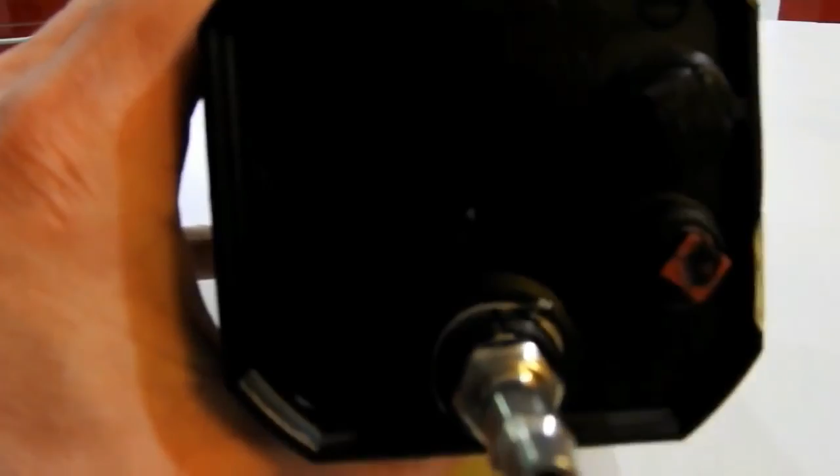You can see on the back here, let's put a light on it. At the top you've got the vacuum port, so you could power this using a vacuum pump. You've got the cage there - I'm guessing you take the bung out and insert something to keep it caged whilst you test it. And then you've got the air inlet, which is the one I'm going to be using, so I'm going to be putting pressurised air into this thing. It just so happened that this standard fitting off a compressor hose fitted the threads perfectly, so that was very convenient.

If I turn it around to this side, it tells us not to exceed 20 inch-pounds of torque, so I know what pressure to apply, or not to exceed anyway. You can see it's still got these warranty seals on just here. It's manufactured by BF Goodrich Aerospace.

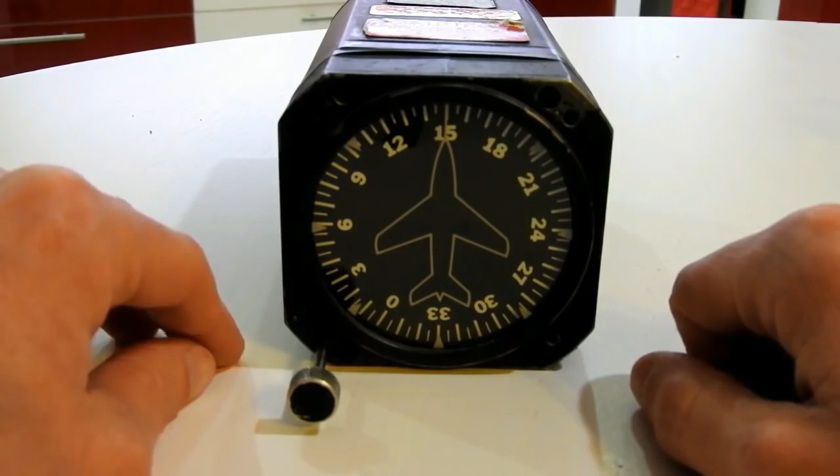You can see here it's got the cage knob, so this is what we would use to set in the heading, aligned to the magnetic compass. It just so happens that it has a nice scale on here, so we can try and capture some apparent drift, because these things, according to mainstream science, absolutely record apparent drift and must be corrected because of it. So I'm going to be testing this in this video later on, and we're going to see if it actually does indicate apparent drift, or whether it only indicates mechanical drift due to friction in the bearings.

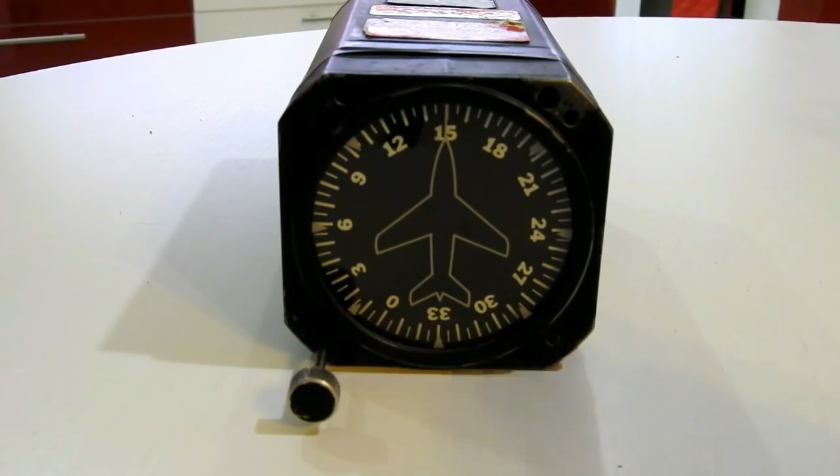Okay, let's go back and have a brief look at how it came to be that gyroscopes are supposed to be able to record or demonstrate the rotation of the Earth.

According to Wikipedia, this man here, Leon Foucault, in the mid-1800s invented the Foucault pendulum, which was suspended from the ceilings of very tall buildings throughout Europe to demonstrate the spin of the Earth underneath them over a prolonged period of time. In 1852, a couple of years later, Leon Foucault came out with, quote, conceptually simpler experimental proof of the spin of the Earth using a gyroscope.

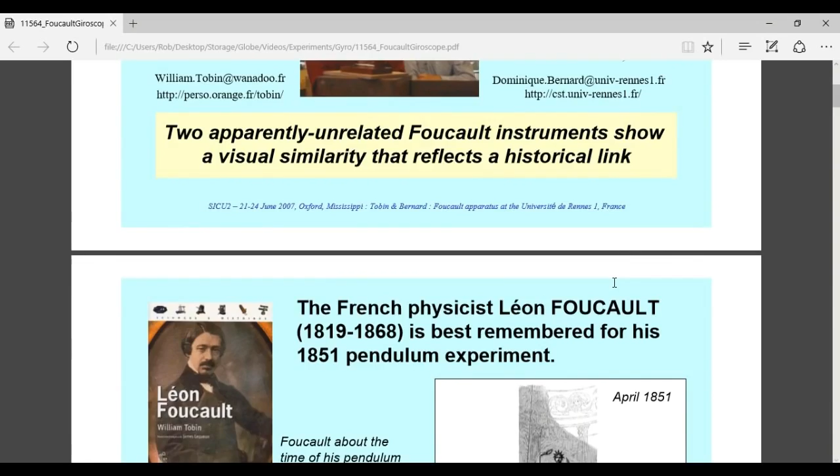So I found a paper online, which I'll provide a link to in the description, written by somebody at the Université de Rennes in France. It says, Foucault gyroscope and induction current apparatus in the University of Rennes physics collection. It's written by these two guys here, which I'm presuming is these two. This paper talks about two instruments - I'm not so bothered about the induction current apparatus.

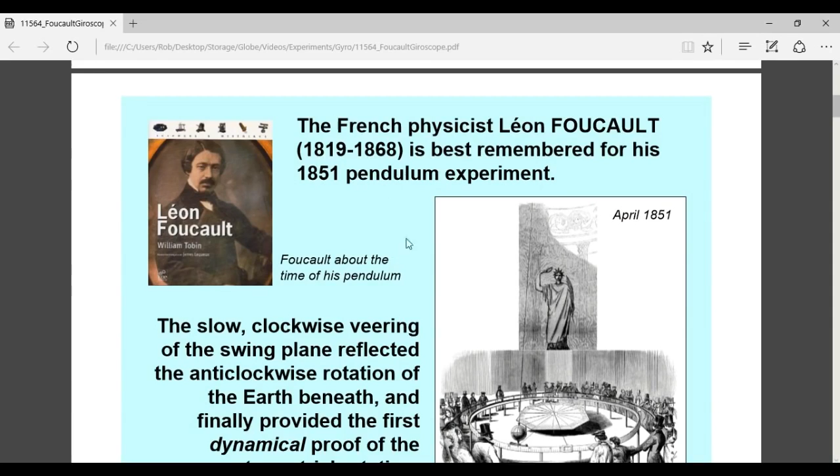So let's read on. The French physicist Leon Foucault is best remembered for his 1851 pendulum experiment. The slow clockwise veering of the swing plane reflected the anti-clockwise rotation of the Earth beneath, and finally provided the first dynamical proof of the terrestrial rotation. And here's sort of a diagram of it.

So the following year, in 1852, Foucault devised a new experiment for demonstrating the Earth's rotation. He called it the gyroscope, from the Greek words meaning to look at the rotation. Low friction gimbals allow the spin axis of the torus to stay fixed in space. The microscope or pointer are used to monitor the slow drift of the axis relative to an earthbound experimenter.

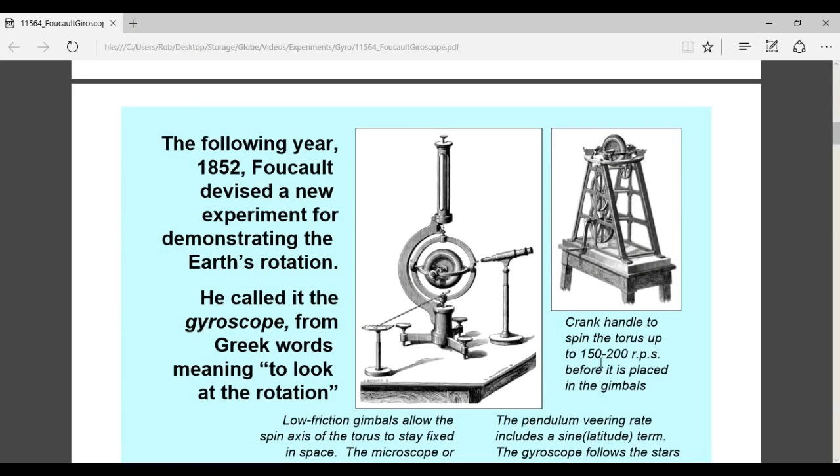This apparatus uses the crank handle to spin the torus up to 150 to 200 revs per second before it is placed in the gimbals, which is here. So the pendulum veering rate includes a sine latitude term, which I'll be using later.

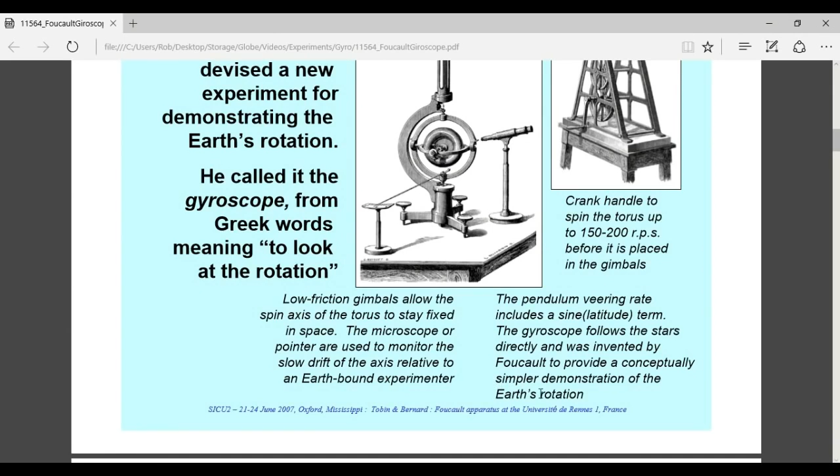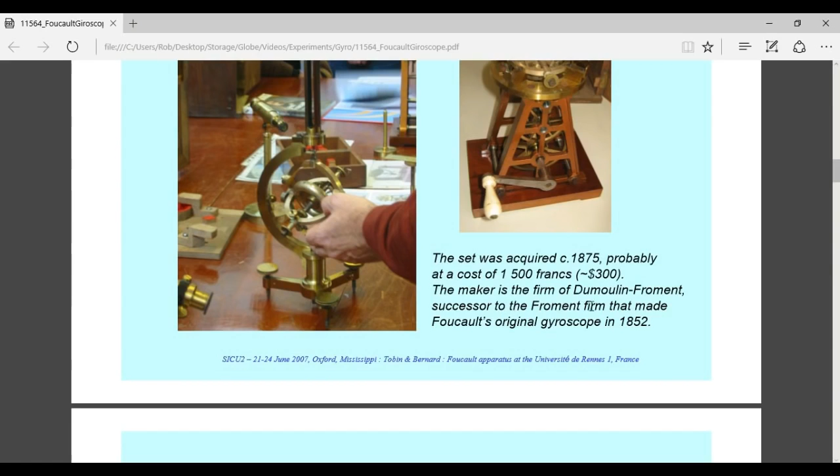The gyroscope follows the stars directly and was invented by Foucault to provide conceptually simpler demonstration of the Earth's rotation. The University of Rennes holds a Foucault gyroscope set in its physics collection. The set was acquired in 1875, probably at a cost of 1,500 francs, which is $300. The maker is the firm of Dumoulin Froment, successor to the Froment firm that made Foucault's original gyroscope in 1852.

So note, this is not the original gyroscope. And whilst we're on this slide, let's just look at the size of the guy's hand in comparison to the gyroscope flywheel there. I first thought that the gyroscope was much bigger, but when you actually see it with a reference, as in this guy's hand, you can see how small it actually is.

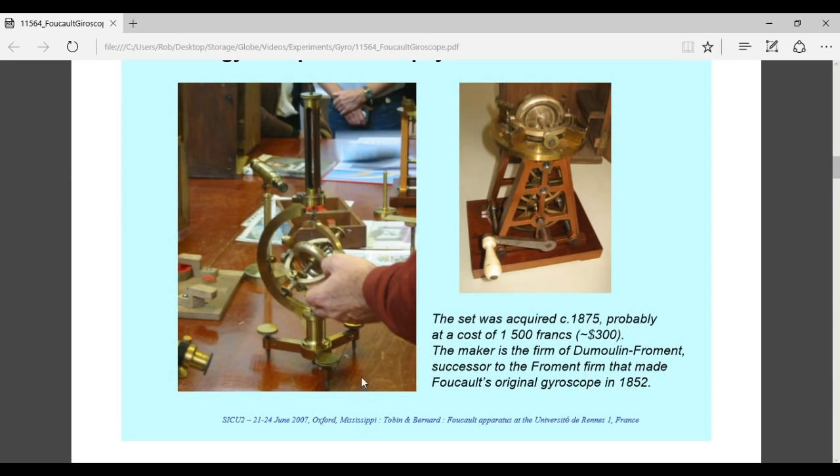And here is the apparatus that's used to spin it up. Foucault gyroscopes are exceedingly rare, perhaps because they were very expensive, 1,500 to 2,500 francs - so not for the common man. The original 1852 gyroscope was bequeathed to the Collège de France and has been lost.

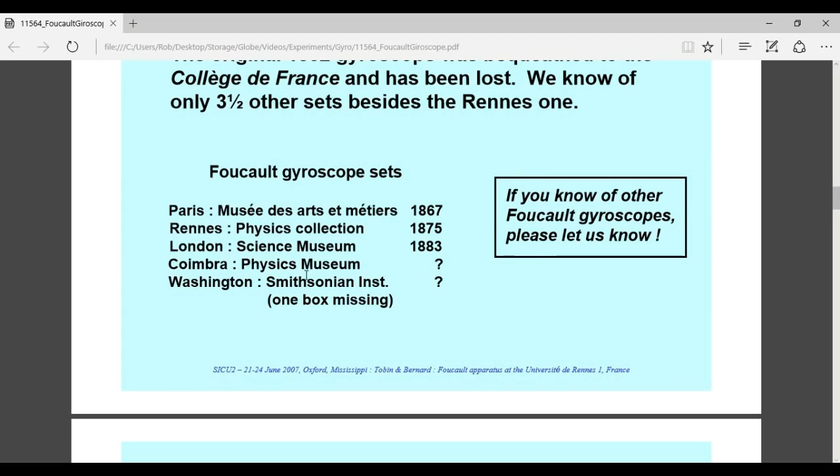Really careless. We know of only three and a half other sets besides the Rennes one. There's one in Paris at the Musée des Arts et Métiers, one in Rennes that this is talking about, one in London's Science Museum, one in Coimbra, and one at the Smithsonian Institute in Washington. If you know of other Foucault gyroscopes, please let us know.

So a gyroscope set came with two rotors. One is missing from the Rennes set, and the other has broken suspension pins, so we have not yet been able to set the gyroscope going.

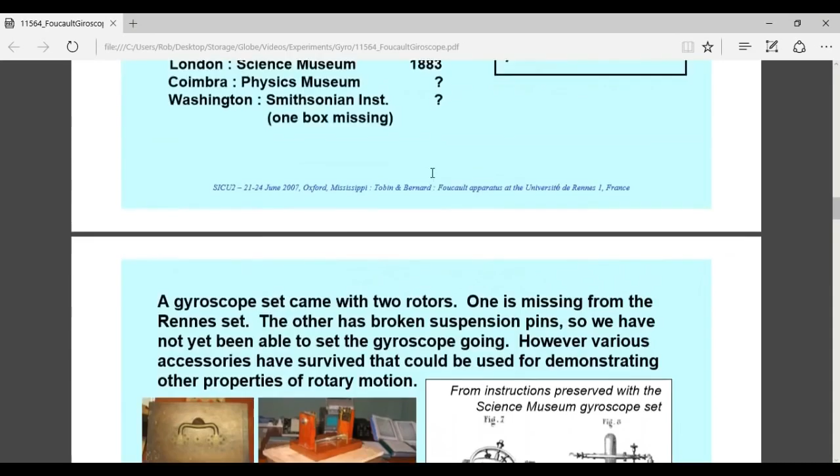What? Not yet? According to this, you've had it in your possession since 1875.

So 144 years later, and they've still not been able to set the gyroscope going. I guess we can't fabricate some pins in this day and age—we just don't have the technology anymore.

However, various accessories have survived that could be used for demonstrating other properties of rotary motion.

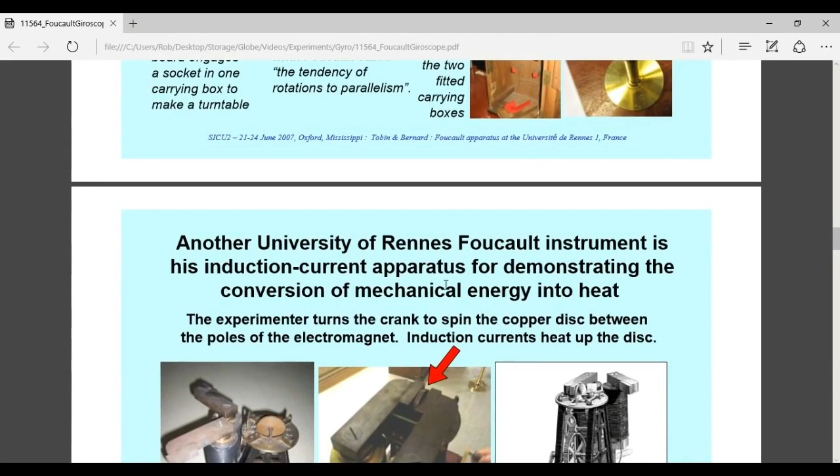There's a few more pictures here, and then it goes on to the induction apparatus, which I'm not really interested in. So let's go on to have a look at some pictures of this original apparatus.

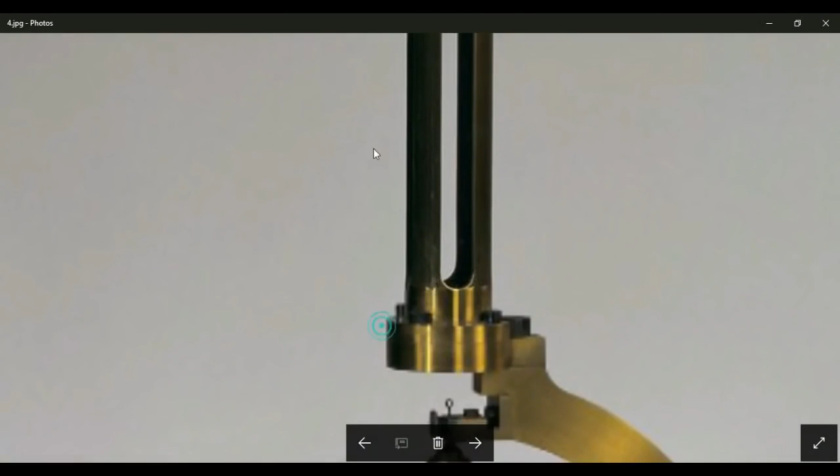Here's a close-up—I'm going to zoom in and show the top. There's a little hook here onto which a low torsion cord would be suspended. This is threaded, so you could screw it up and down by hand. The cord would attach onto this little loop, and the whole gimbal is able to spin freely upon this domed piece of steel via a tapered conical piece of steel, forming a low friction bearing point just here.

The sides of the gyroscope have bearings called knife edge bearings—I'll show a close-up in a second. The bearings in here, the main spin axis bearings, weren't even ball bearings, because ball bearings hadn't been invented yet. They'd been patented by 1852 but not manufactured—I think it was 1869 before the first ball bearings were actually used. So much more inferior bearings here than what we use today.

Okay, so I have replicated this setup, and the next few experiments are going to demonstrate what I have come to learn from them.

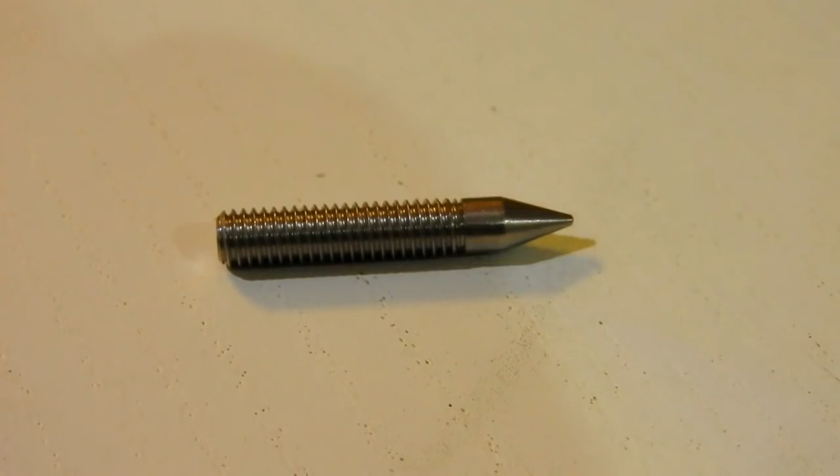For the low friction bottom pivot point, I'm going to use one of these—a speaker spike. You have four of these attached to the bottom of a speaker, and the idea is that because only a tiny bit of the surface makes contact, it prevents resonance and loss of sound. That's the idea anyway. I've bought this and will use it as the bottom part, so this will sit through here once I've threaded it properly. I might have to cut a bit off the top, shorten it down, but essentially that's going to be the part that contacts with this part here to cause a low friction pivot point.

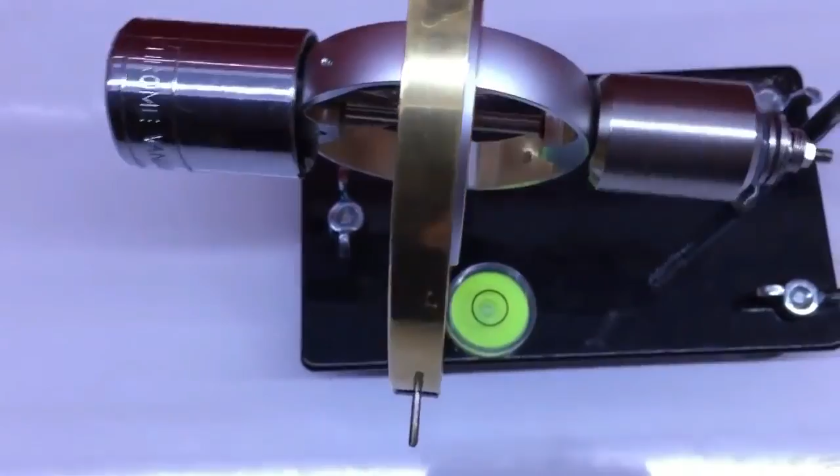And I'm able to use this hex key adjustment here and raise or lower this gimbal, and I can lower it so that the speaker spike drops down nice and gently and controlled onto the bolt.

So as you can see, if I go to the end here, the little piece of metal you can see there is part of a pencil sharpener blade. I've just cut it in half, put one on each side. So these, I guess, knife edge bearings here, they're not quite a knife shape, but the diameter I would guess is not far off the bottom of the knife on Foucault's knife edges.

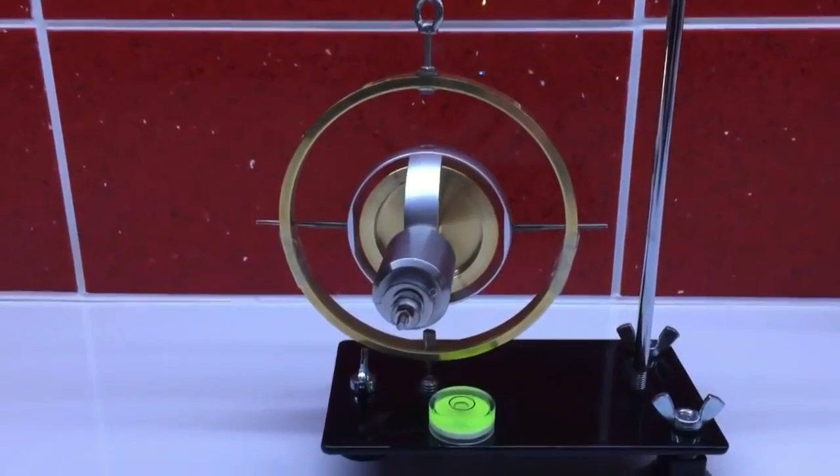So I'm going to spin it up and show you what I mean. It's quite bizarre, and I didn't know that this phenomenon actually occurred with gyroscopes. So I'm going to stop the video now and get it spinning.

Okay, so I'm going to be spinning the gyro with my Dremel tool, and you can see there it's 33,000 RPM. That's no load, but it will virtually be no load once it's up to speed. Let's spin it up then.

So let's observe what happens.

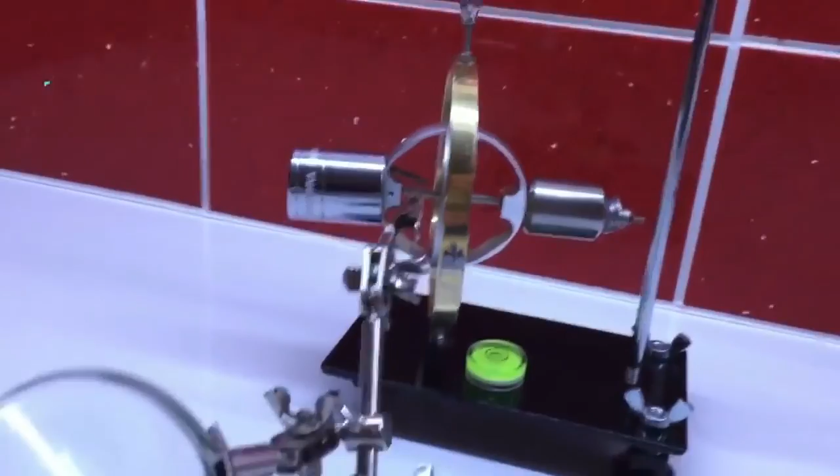Let's see if it's going fast enough to do it again. Now watch carefully, watch this axis very carefully to see if it moves when this touches.

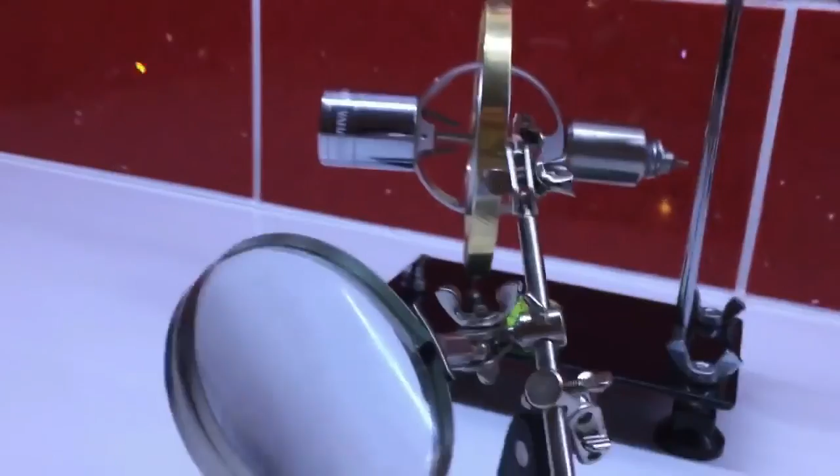Did you see that? It precessed itself back up straight again, and it's sending it back round clockwise now.

It will continue to do this, and it will actually in fact carry on going one way and then stopping and coming back the other way without me impeding it. But you can clearly see it's moved quite a long way from the crocodile clip there now.

And to further prove that it is still working as a gyroscope should work, I'm going to move it manually. Put it back straight again and see what it will do this time.

Okay, so this time I've let it come to a complete rest, and I've added a protractor and a paper clip as a marker, and we're on 129-ish at the minute. So I'm just going to give it a quick nudge and see if we can get it to come back to its original position.

There we go. It's 128 now, it's close enough. Just spin it up.

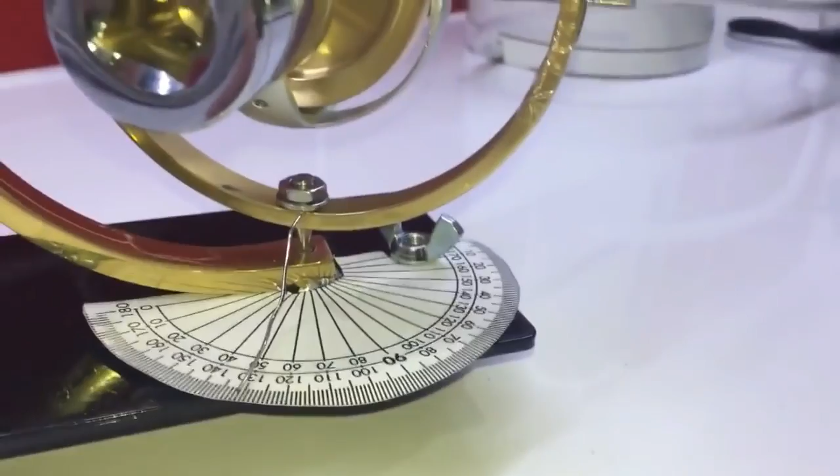Okay, you'll note I haven't got it quite straight. It's slightly over to the right at the top. But let's just observe what happens here to this angle.

Anyone guess what's going to happen?

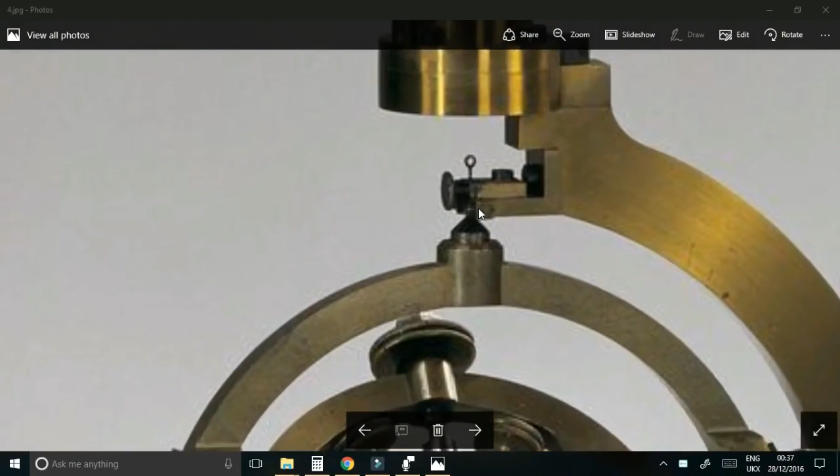We also saw earlier how a particular rotation or direction of rotation can be induced into the gyroscope. So it doesn't take too much of a stretch of the imagination to wonder if the rate at which it rotates could be controlled. I'm just putting this out there for consideration. I'm not saying this is what it was for, but let's just take a look at the top of Foucault's gyroscope here and look at what the function of this could be. It looks like to me it puts a pressure on the pin there, and it looks like it's threaded. So you could fine-tune that if so desired to slow the rotation down to a certain speed given a bit of trial and error. I mean, I can't think of a logical reason why you would need this. I certainly didn't need anything like this in my experiment.

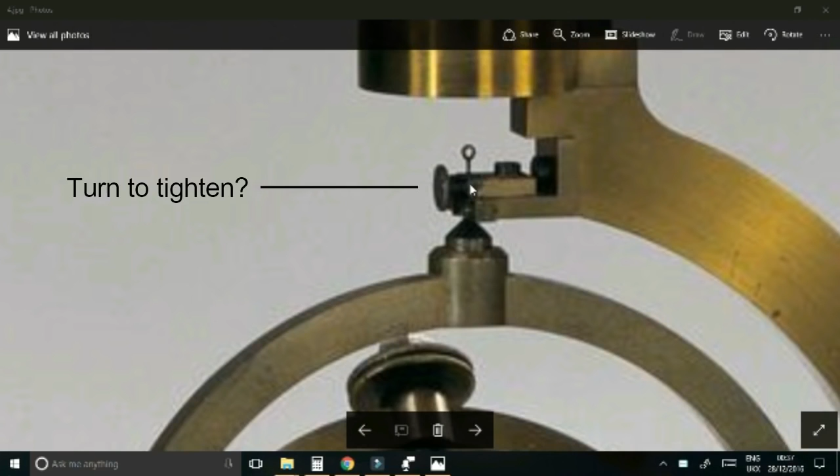The only other thing to consider, I suppose, is that this isn't actually the original gyroscope from the original Leon Foucault experiments. That one was lost, so I guess we'll never know what the actual one looked like. We can only presume that it looked similar to these ones.

Anyway, that's the end of part one. I'm now going to move on to the aircraft instrumentation section to this.

So I've watched this Navy training video countless times now to really try and get it into my head, everything that he's saying. So I'm going to play certain parts of it now, and I'm going to be commenting on certain parts of it, and analysing certain parts of it, just to put you in the picture as to where I am at with the whole gyroscope thing.

Modern high-performance aircraft require electric gyroscopic instruments: the turn and slip indicator, the attitude indicator, and the directional gyro. This film will explain the theory of operation of some of the newer electric gyroscopic instruments. To understand any gyroscopic instrument, you must understand the principle of the gyroscope. It consists of a rotor mounted in a gimbal. The rotor can spin in one plane only. When another gimbal is added, a second plane of movement is possible. And when this assembly is mounted in bearings, the rotor has 3 planes of movement and can assume any possible attitude.

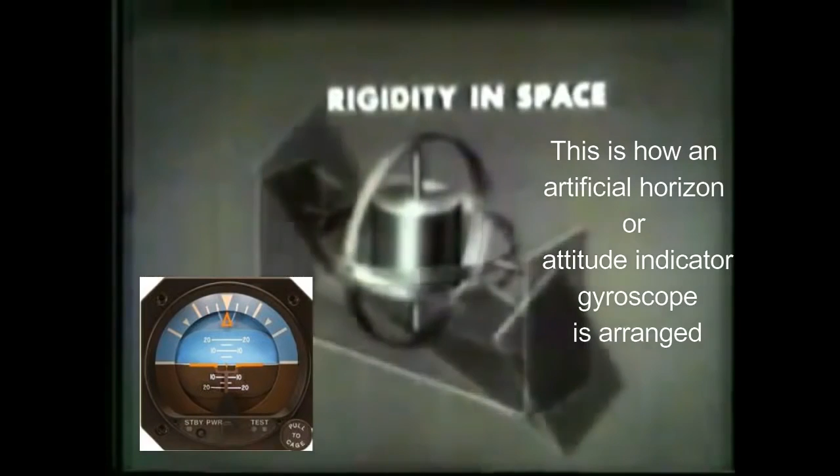As for rigidity in space, the spinning rotor remains in its original attitude, while the gimbals and base move around it. In other words, the gyro maintains its axis in relation to space and not to the surface of the Earth.

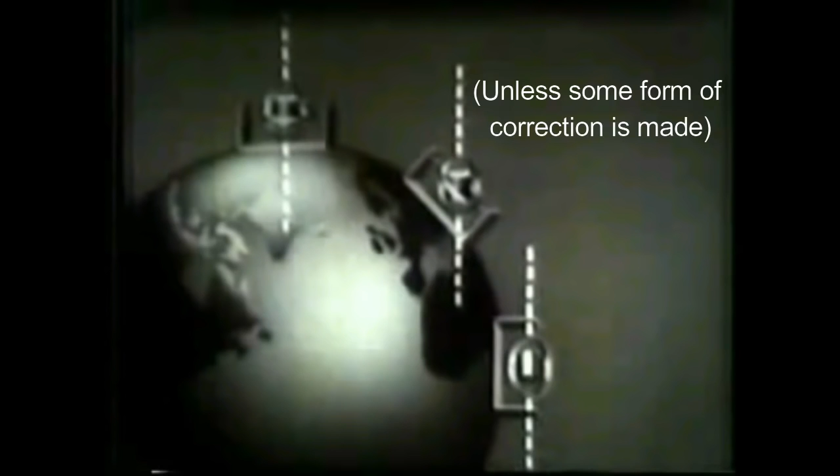If a gyro moves around the Earth, its axis is vertical to the Earth's surface here, at an angle here, and horizontal here. So very clearly here, he is saying that a moving object, like an aircraft, that is moving along the curvature of the Earth, because they are actually tilting as they move in relation to space, the gyroscope will remain rigid and won't move. So it will appear to an observer in the aircraft that the gyro has actually moved. That is clearly what is being stated here.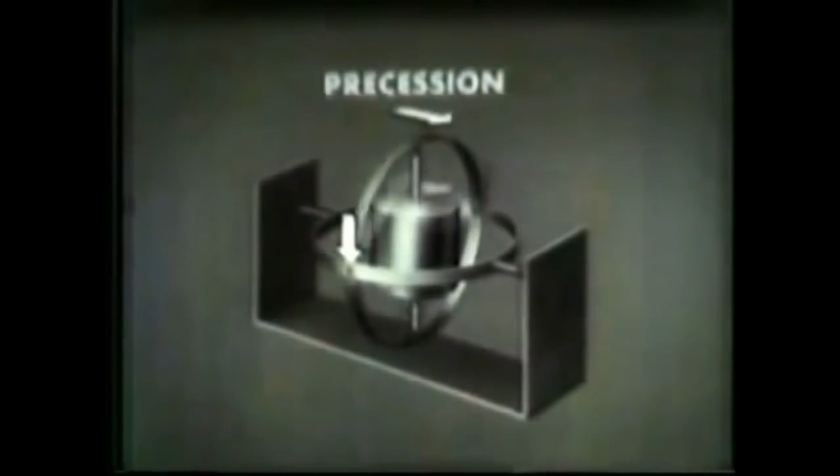The gyro will resist any force that attempts to change its plane of rotation. This leads to the principle of precession. When a downward force is applied here, the gyro moves, but not in the direction of the applied force. Instead, it moves at right angles to the applied force. This action is known as precession.

If an upward force is applied at the same place, the gyro again precesses at right angles, but in the opposite direction. The explanation is simple. The rotor is spinning in this direction. When the force is applied, the gyro precesses in a direction to align the direction of rotation with the direction of the applied force.

The rate of precession is in direct proportion to the applied force. Small force, slow precession. Greater force, faster precession. If enough force is applied, the gyro precesses a full 90 degrees. However, at or near 90 degrees, it will tumble and go out of control. This disadvantage must be overcome in gyro instruments.

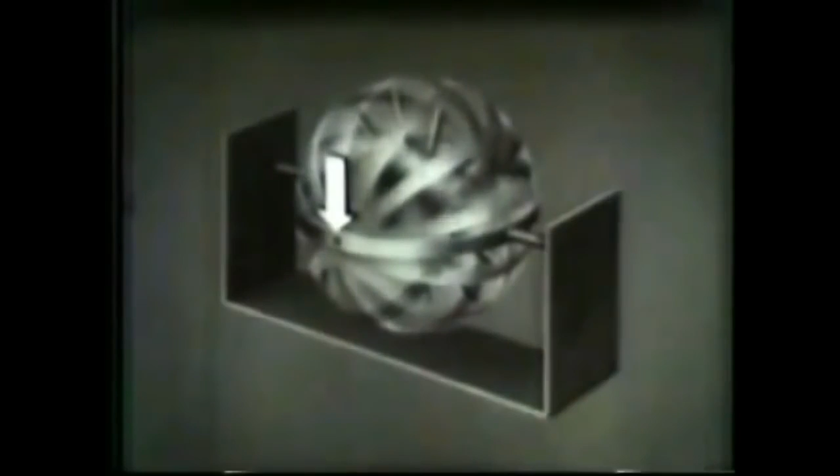Another disadvantage comes from the gyro's tendency to drift away from its original attitude. There are two types of drift. One is mechanical, due to friction in the bearings. The other type, known as apparent drift, relates to rigidity in space.

Once again, consider this condition. The gyro maintains its attitude while the Earth turns under it. Every 6 hours, the gyro drifts through 90 degrees in relation to the Earth's surface. Okay, I've got to stop it there because this is where a lot of confusion arises.

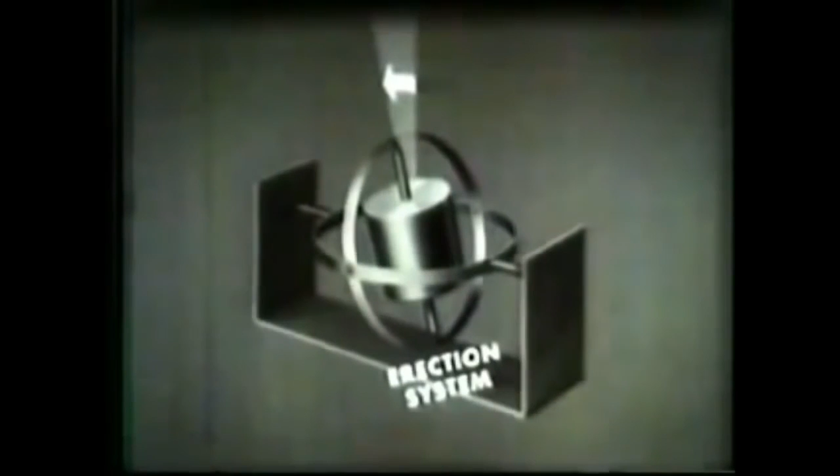In order for the gyro instrument to be dependable, drift must be corrected continuously. There are several types of erection systems that correct for drift. The principle back of all these systems is based on 3 steps. The direction and degree of drift are measured by electrical or mechanical sensing elements. These elements then control the application of a proper force to the gyro, and it precesses back to its normal attitude.

He does go into quite a lot of detail on how these actually work, using servo motors and the sensing elements to send an applied voltage to the motors to precess it back into its original position. So feel free to watch that video in its entirety, but I'm going to move on from there.

All gyros in this film are actually the rotors of electric motors. However, for simplicity, we will represent them like this, and this.

Okay, so I've drawn the missing axes on each of these gyroscopic instruments. We'll start with the one on the left, the turn and slip indicator. This is probably the simplest of the 3. It uses a spring to return itself back to centre each time once the turn is finished. So I'm going to disregard that particular one.

The artificial horizon, or the attitude indicator in the centre there, is the one we've just been looking at, and this is the only one of the three that remains rigid, as in it stays in its original position throughout an entire flight. So the whole gimbal housing, or the instrument housing, rotates around it as the rotor stays upright.

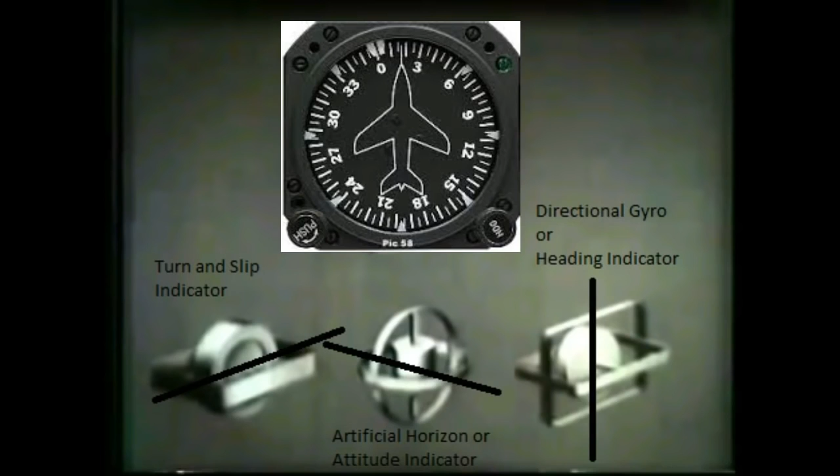So before we move on to the directional gyro, I'm just going to play a short clip from another video that explains how air-powered artificial horizons or attitude indicators work, because I believe there's a good test we can do to determine whether the pendulous vanes on these instruments, which is the method by which they remain erect, actually correct for the rotation of the Earth, or whether they are just correcting for mechanical drift. So I'm going to play this video and they'll explain how it works, and then I'll tell you my idea of how, if I'm able to attain one of these air-driven artificial horizons, I can test it.

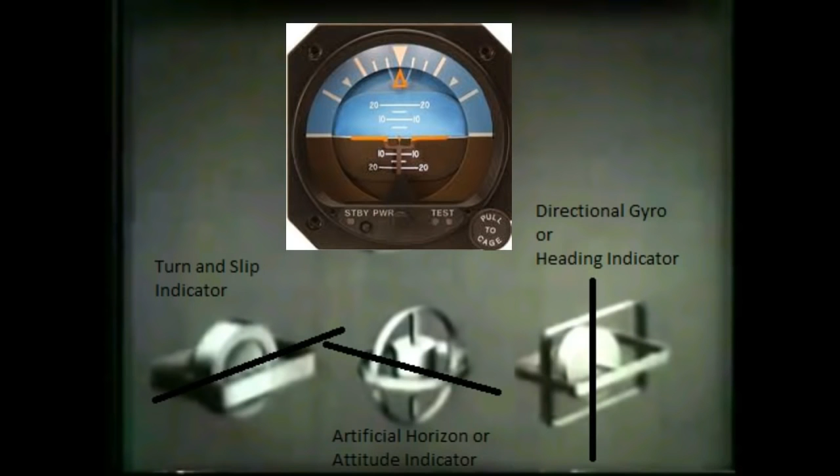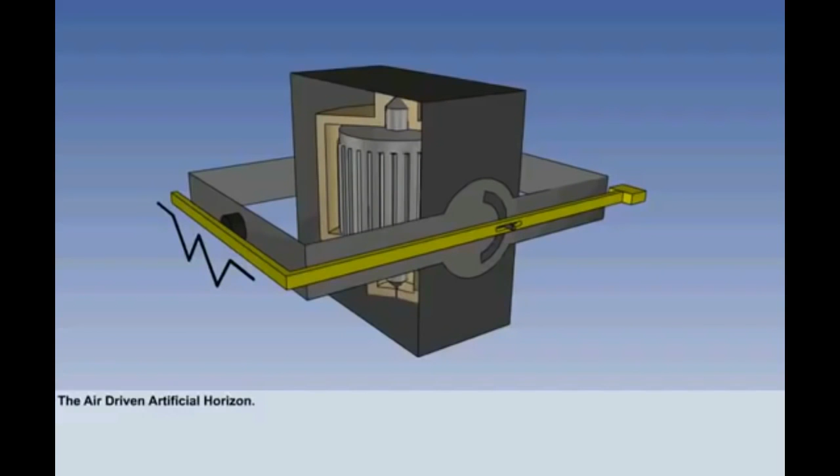The Earth gyro in the artificial horizon or attitude indicator may be air-driven or electrically driven. Let's look at the air-driven version first. In the air-driven artificial horizon, the spin axis of the Earth gyro is tied to the Earth vertical by a system of pendulous vanes and air jets. Any tendency for the gyro to topple is counteracted by the precessed reactive force from the air jets. The centre of gravity of the gyro is also kept below its pivot point on the inner gimbal to assist in keeping the gyro vertical when not in use. Let's look at how it works in more detail.

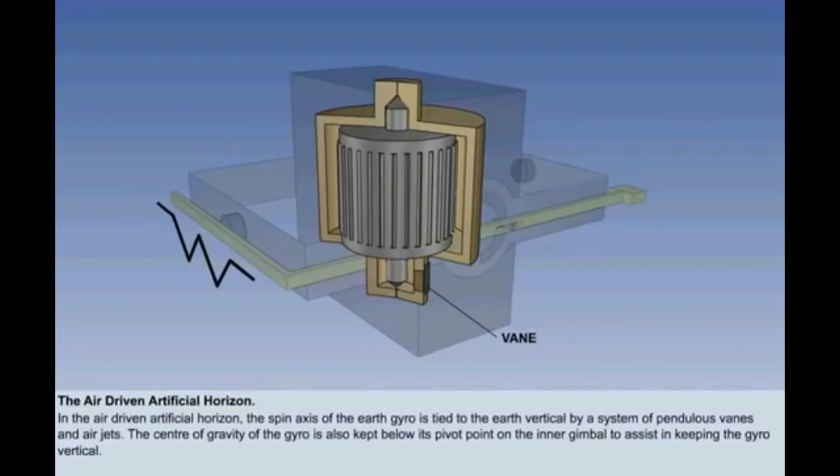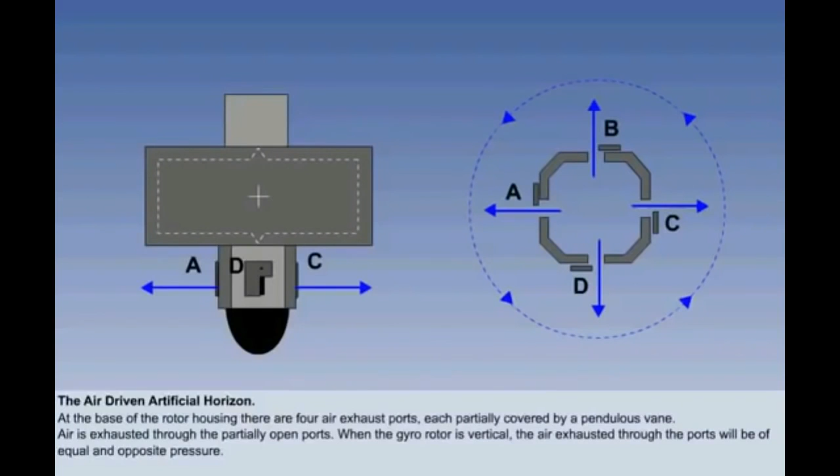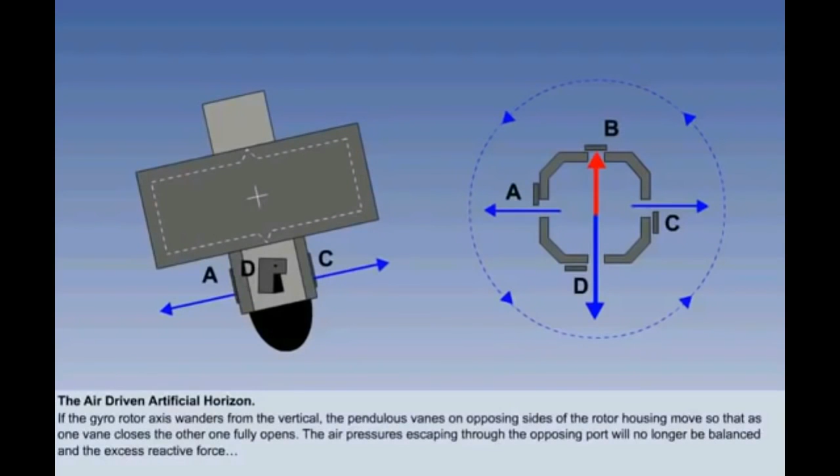If we look at a diagrammatic view of the gyro and rotor housing, we can see that at the base of the rotor housing there are 4 air exhaust ports. Each port is partially covered by a pendulous vane, which we will call A, B, C, and D. Air is exhausted through the partially open ports, and when the gyro rotor is vertical, the air being exhausted through the ports will be of equal and opposite pressure. However, should the gyro rotor axis wander from the vertical, the pendulous vanes on opposing sides of the rotor housing move, so that as one vane closes, the other one fully opens. In our illustration here, the gyro rotor is toppling, and we can see that by gravity vane B has closed, while vane D has fully opened. The result is that the air pressure escaping through the opposing port D will no longer be balanced, and the excess reactive force is precessed through 90 degrees in the direction of rotation of the rotor to re-erect the gyro.

Okay, so now we know what the pendulous vanes are and how they work. We also know that the pendulous vanes in the air-driven artificial horizon are the one and only means to compensate for apparent drift, i.e. rotation of the Earth. So it seems to me that if I was able to get hold of one of these things, open it up and disable the pendulous vanes or remove them completely, then test it, it should bring apparent drift right back and should start demonstrating it.

I'd like to know what you guys think about that, or if anybody else wishes to buy one of these gyros and test it for themselves and make a video, then please do so, because I'm going to continue with the directional gyroscope for the rest of this video, and we're going to leave the artificial horizon behind.

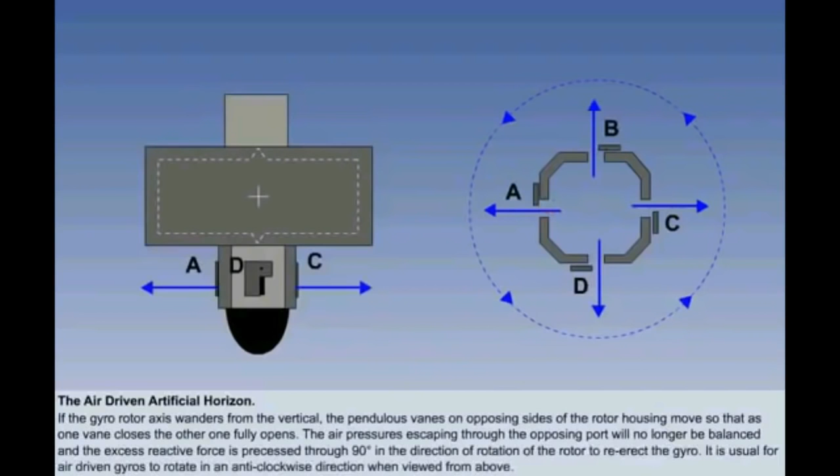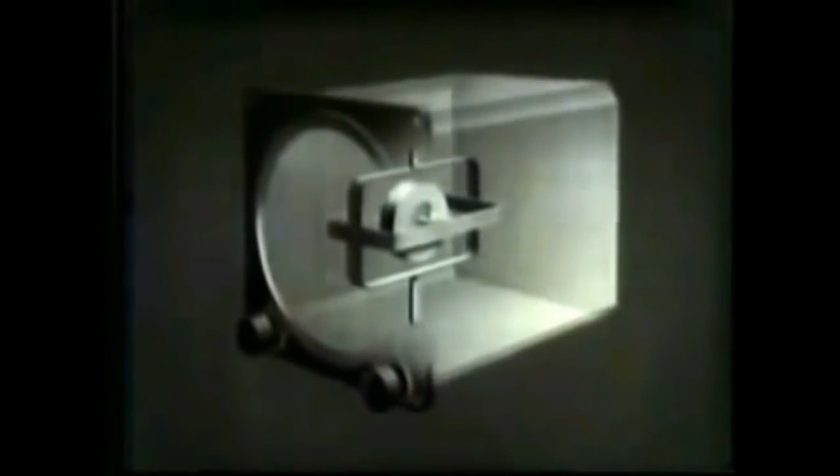The aircraft heading is indicated here, and the reciprocal heading here. To obtain this information, the instrument uses a freely mounted gyro. Due to its property of rigidity, the spin axis of the gyro will hold its attitude as the aircraft and instrument case turn about it. Secured to the outer gimbal is a gear. Its teeth mesh with the teeth of another gear, to which the compass card is attached. Before it can indicate correct headings, the compass card must be set to the heading of the aircraft as indicated by the magnetic compass. The push-to-cage knob is used to make the setting, after which the gyro controls the compass card.

Assume the aircraft makes a 90-degree turn.

The instrument case turns around the gyro and lower gear. As a result, the vertical gear makes a quarter turn as it travels around the lower gear. So the compass card also makes a 90-degree turn.

In this instrument, apparent drift causes the compass card to drift away from its heading about 3 degrees every 15 minutes. And so, every 15 minutes, it must be reset to the magnetic compass heading.

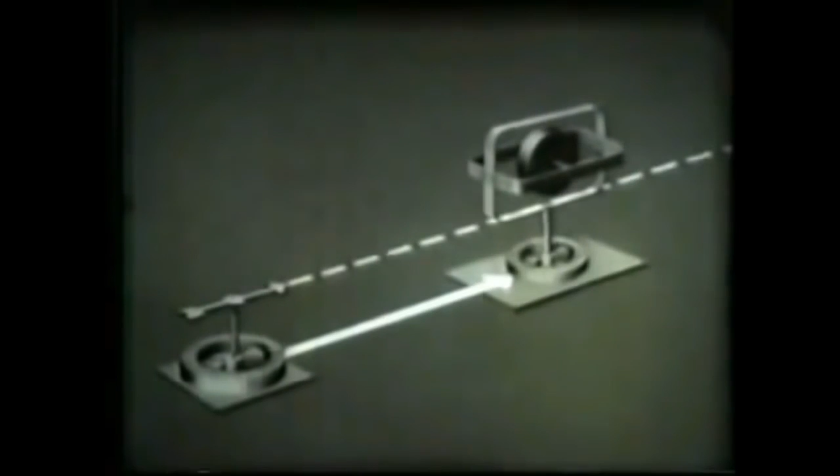But from what I've read into it, they never worked properly anyway. So that's kind of outside of the scope of this video, so I'm going to leave that for now. And I'm going to move on to some geometry and to show how much these gyroscopes should move at my location where I am presently. And I'm going to verify it using maths as well.

Okay, so exactly how far does the Earth rotate in 15 minutes? Well, we know it takes 360 degrees to do a full rotation, and we know it takes 24 hours, so let's divide that out. That gives us 15 degrees per hour, and we know there are 4 15-minute periods in 1 hour, so let's divide that by 4, and that gives us 3.75 degrees of rotation every 15 minutes.

So I've drawn the Earth here, and I've drawn a couple of gyroscopes, one at my location, just here, and one at the equator, just here. So if I just take a quick look, let's look at this one first from the side.

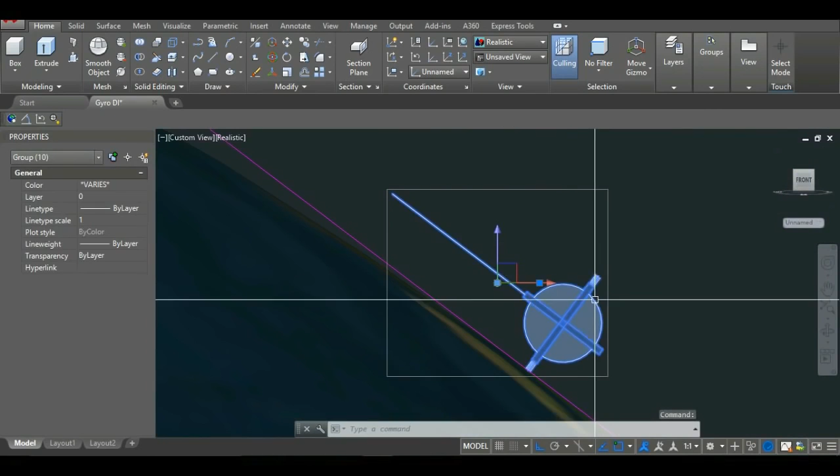You can see it's exactly perpendicular to the Earth, and just here you can see this one is also perpendicular to the Earth. If I switch to 2D wireframe mode, you'll see I've drawn a line up here at 53.06 degrees from the equator, which is my exact latitude, and obviously this one is dead on the equator.

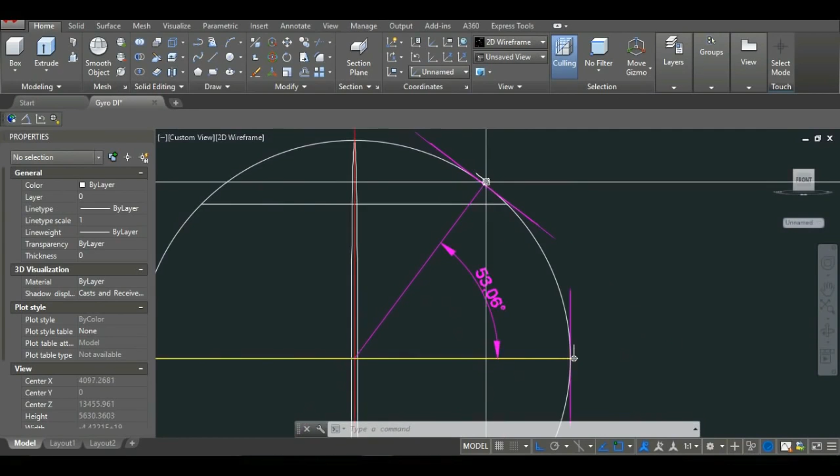So let's switch back to 3D realistic mode, and let's pan around, just take a look at it for a minute. Okay, so they are orientated like the directional gyroscope, like the one I have.

And now we're going to rotate the Earth through 3.75 degrees. You see it's rotating about the red axis there, and all I need to do is type in 3.75. There we go. So let's look at the one at my location first.

Remember, I haven't rotated the gyroscopes. I left them in their original position since gyroscopes remain rigid in space. So now all I have to do is move the gyroscope into its original location without rotating it.

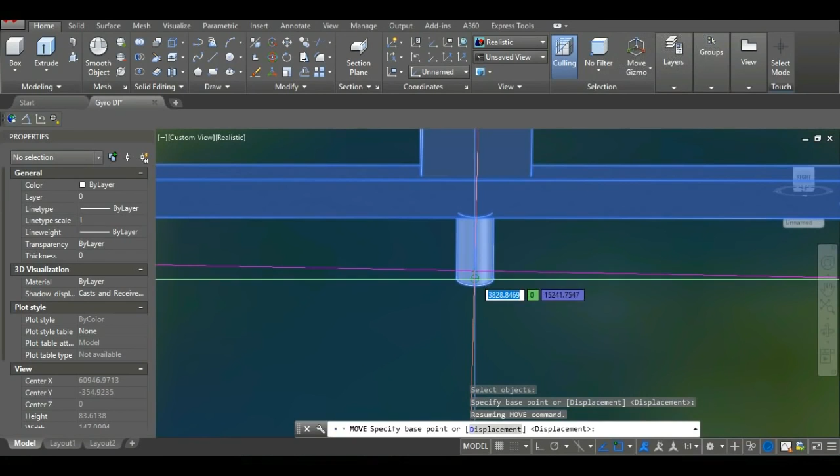Let's move it back to here, and I'm going to do the same with the one at the equator. So let's move it. And we'll take a look at this one first. We've got to reset the view so that we're looking directly from above again.

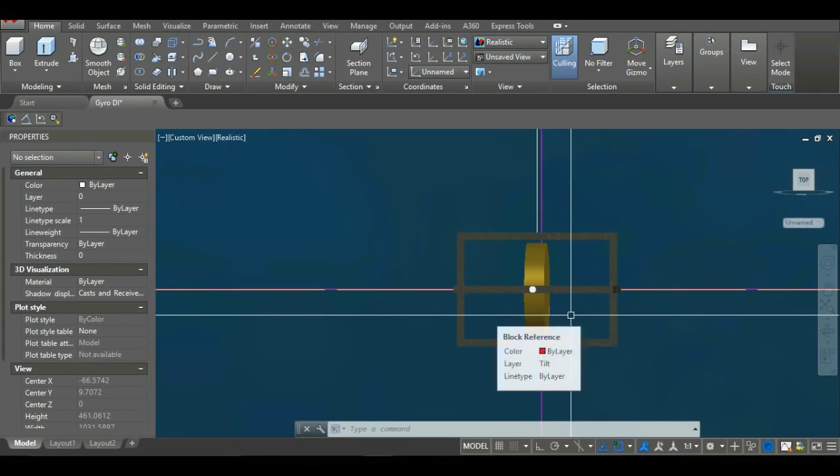And although the gyroscope has tilted over to the left at the top, it hasn't actually rotated clockwise or counterclockwise as viewed from above. It stayed in its original location.

Let's look at what happens at my location. So I have to reset the view again, so we're looking directly above this location. Okay, there we go. And you can see it has rotated clockwise. So let's just put a quick angle on there to see by how much it has rotated.

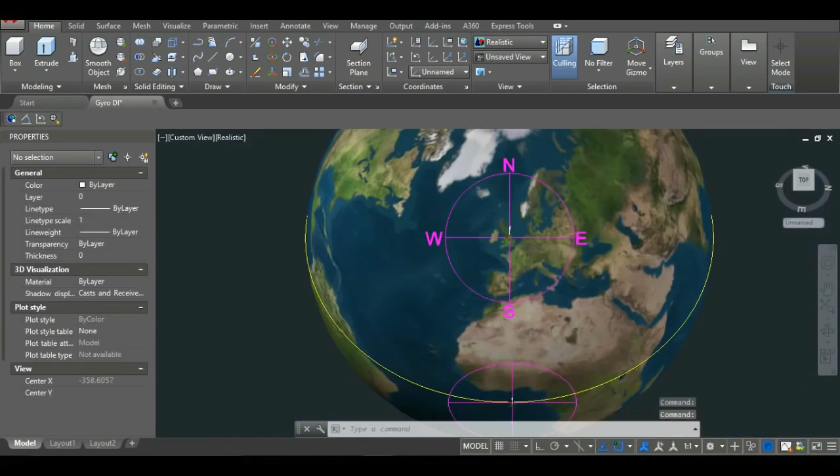3 degrees. So it just so happens that my latitude corresponds to the exact correction degree that you're supposed to put into the gyroscopes every 15 minutes. But that is just purely coincidence. The further north you go, obviously the more the rotation occurs, and the further south you go, the less, until you get to the equator where there's no rotation. But anyhow, going back to my location, let's see if we can verify the 3 degrees that we've just witnessed here using maths.

So let's get the calculator up again, and we know that the calculation is the sine of your latitude multiplied by 15 degrees per hour. So let's do that bit first. So it's 53.06, which is my latitude. We'll take the sine of that and times it by 15. That gives us 11.9 degrees of rotation per hour. And again, we'll divide by 4 to get 15 minutes. 2.9972 degrees in 15 minutes. So it's 0.01 of a degree out. So hopefully you can see that the maths and the geometry work.

We could do the geometry at the equator here, but since it's 0 degrees, the sine of 0 is nothing. So let's just, for the sake of argument, put 1 degree in so we can get an actual result. So I'll put 1 degree of latitude, take the sine of that, multiply it by 15, and divide that by 4. That gives us 0.065 degrees of drift every 15 minutes. So obviously that's at 1 degree north of the equator. So if we was to say that was a 10-hour flight, we'll times it by 4 again to get back to the hour, and then times by 10.

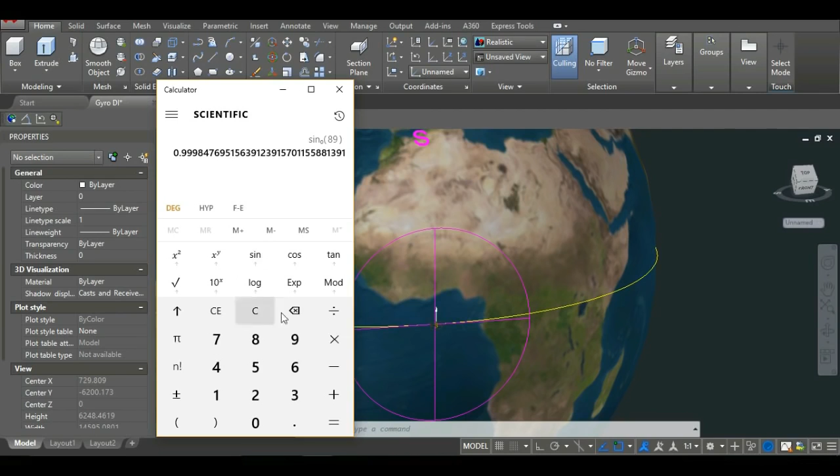So there would be only 2.617 degrees of drift over a 10-hour flight, which is certainly different to what would occur at the pole. Let's just take the pole now, for instance, and we would put in, say, 89 degrees. Take the sine of that, times 15, and divide by 4. That gives you 3.75 degrees of drift every 15 minutes at the pole. So, wildly different from 1 degree to 90 degrees. This would be very, very noticeable, in my opinion, on the directional gyroscopes, especially a flight that starts near the equator and flies either north or south.

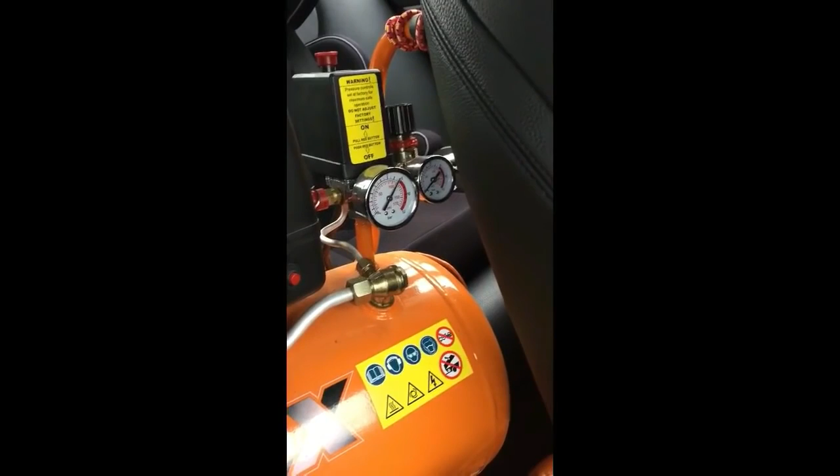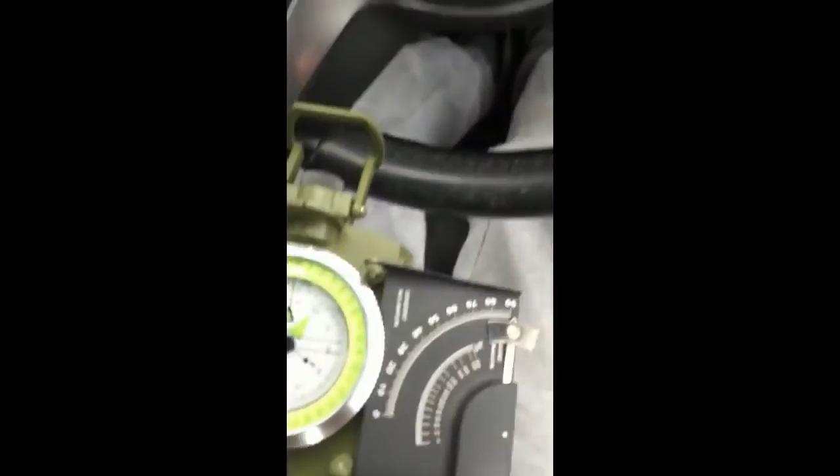Okay, I've put the directional gyro on my dashboard. I've stuck it with some self-adhesive sticky pads. Got the airline there, going to the compressor in the back here. Got a full tank of air. So I'm going to set this thing going, and I can't really set the compass heading correctly in here because I've got my compass here, but there are so many magnetic disturbances in this car. No matter where I move it, it changes. See there, I'll just move it slightly, it changes. So I can't get it in a fixed position, but it doesn't matter. It's just the concept of the proof that the gyroscope actually works as it should do that I'm interested in. Now the air isn't going to last very long, but it obviously still spins once the air has gone for quite a long time. So really this is just to show that this gyroscope is behaving as it should do. I'm going to try and secure the camera as best I can.

So normally we would take a magnetic compass reading at this point if we was in an aircraft, and we would use this cage dial and we would set in whatever heading we are currently facing. I know we're roughly about 270 degrees where I am here, so I'll put that in. I'm going to have a little short drive once I've turned the air on and got the gyro spinning up. If you can hear it there. And let's go.

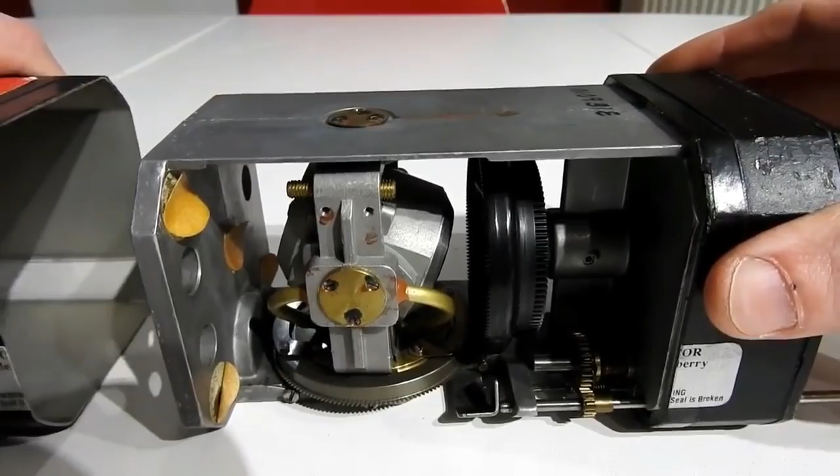Wow, that's quite complicated. So that's just fallen off. Seems to be these papery stickers here, but the gyro itself...

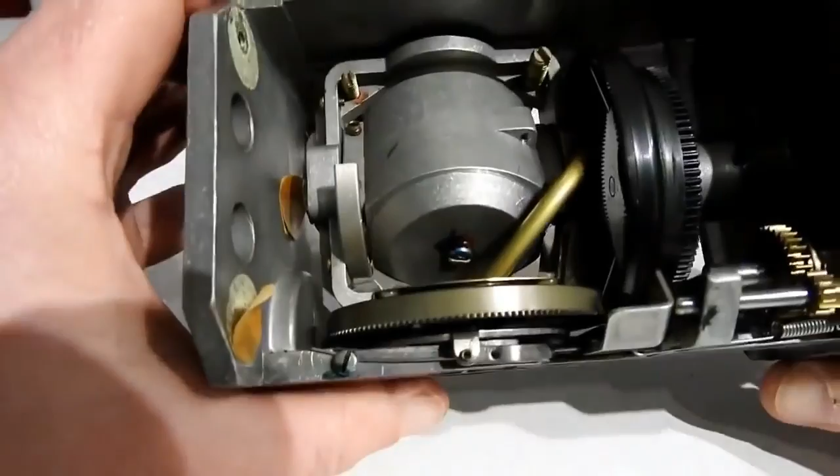Quite amazing. There's nothing electrical in here at all, no wiring of any kind. It's purely air driven.

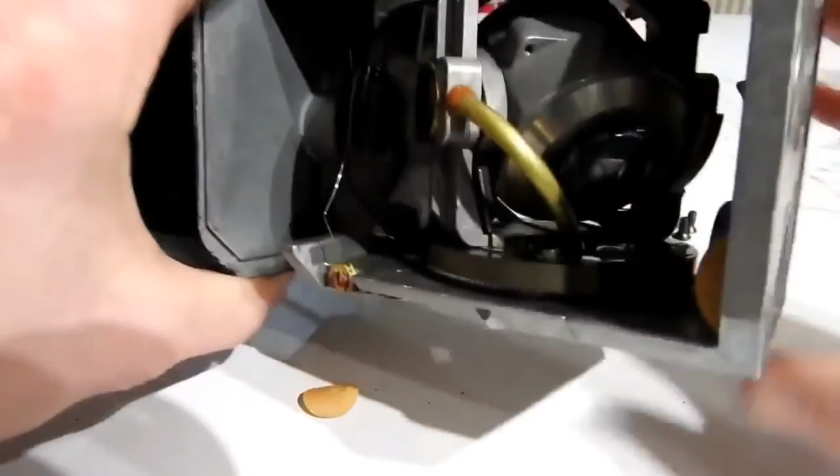You see this gear at the bottom meshes with this gear and gives us the reading on the front.

That's the cage knob. You can see it makes this gear mesh with this one, so we can set it manually, and that also disables this here. See, I can't move it now, whereas now it spins freely.

I did notice something on the other side here. I say there's nothing electrical, but I'm not sure what this would be. It's a piece of wire, really thin. It's just touching on that wheel.

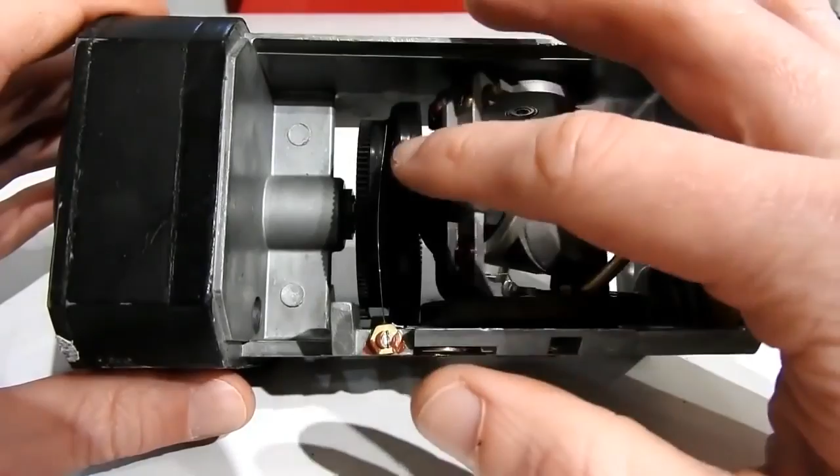Whether that's some sort of earth point, I'm not sure, but you would need to connect a wire to this, unless the case of it is actually earthed to the body of the instrument housing, which is in turn earthed to the body of the aircraft. But then again, aircrafts don't really have a proper earth, since they're not in contact with the ground. But it seems it is just as simple as that.

This can't move all the way around, it's got stops just there and there. And then this is obviously free to spin round and round.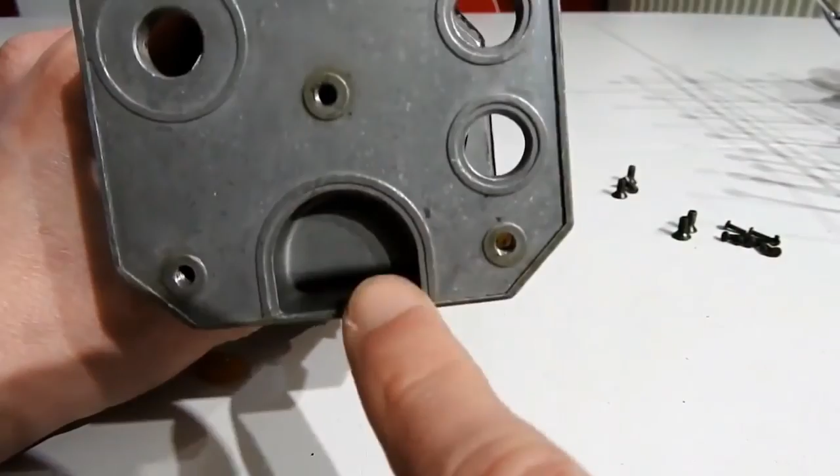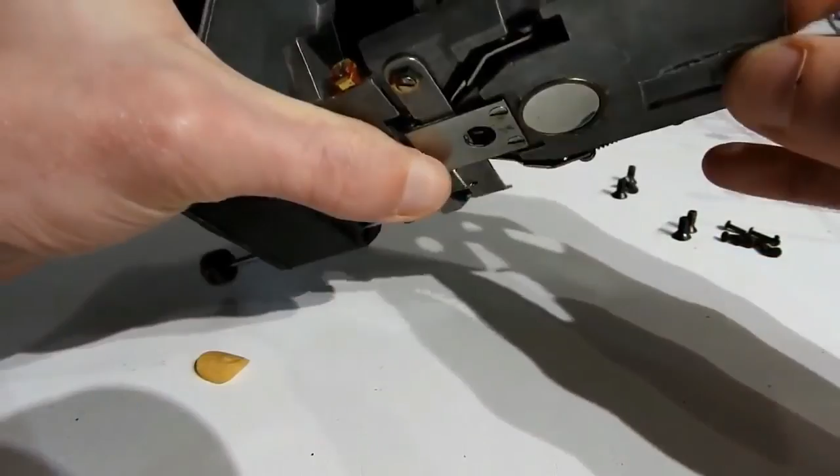So how does it get powered then? I obviously had this bottom port connected for the air supply, so it looks like it goes down here, and it must go through this casing itself.

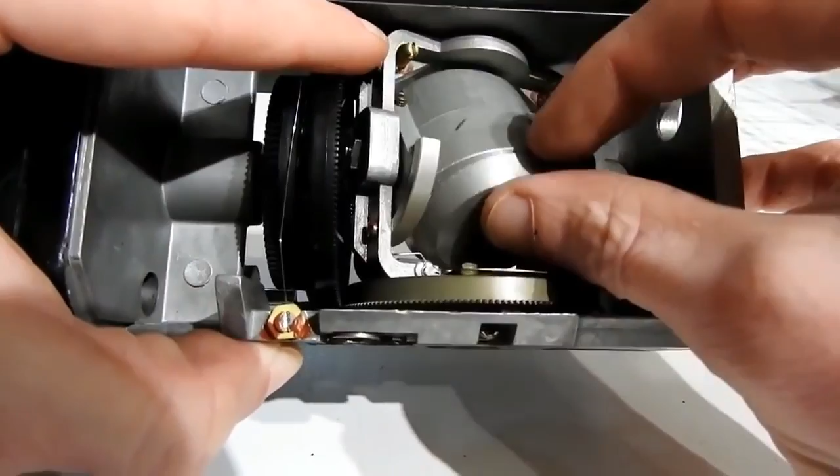And the air must be directed somehow at the flywheel. I'm guessing the flywheel must be inside, in here, you just can't see it. So the air must be directed to it, I'm guessing through these. One might be connected to the vacuum port and one might be connected to the air inlet port, but they certainly go down into the bottom here.

Yeah, I think that's how it works. The air goes in here, and then between these two pieces of metal here there must be a chamber that connects somehow to the centre, which these pipes here are in contact with. So the air must come through here, up these pipes, and inside this thing with the actual flywheel inside there. Can't actually see it.

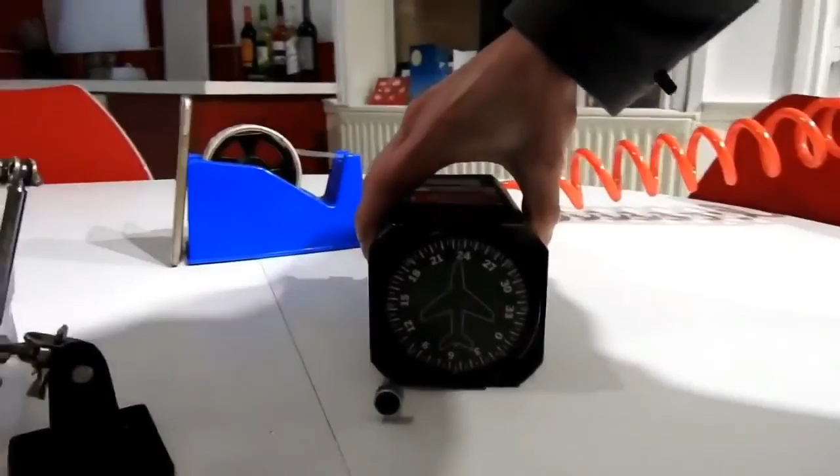Must cage it at the start of the duration test. It's caged. I'm going to just cage it again for good measure. And let's start the clock.

So what should actually be happening during this experiment is that this should be moving clockwise as viewed from above, at a rate of 3 degrees every 15 minutes at my location, and this should also be leaning over like this. Obviously I've exaggerated it there, but that is what should be happening.

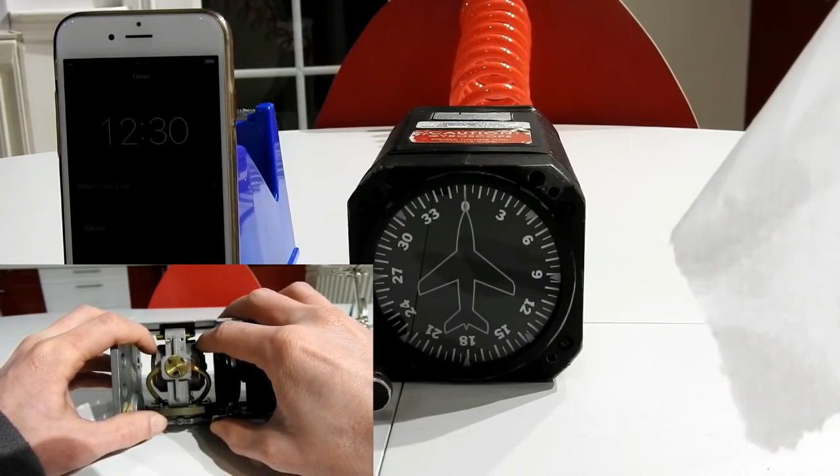So during straight and level flight, this whole setup here is not experiencing any friction on any of the bearings, only perhaps on the spin axis bearings of the spinning rotor itself, but that doesn't induce any mechanical drift. It's only the gimbal bearings that induce the mechanical drift. So in straight and level flight, nothing is moving, so no friction is being generated.

If the pilot makes a maneuver that induces some sort of movement onto any of either this axis or this axis, it will result in a cumulative build-up of drift caused by all the friction. And this is exactly what the 3 degrees of drift every 15 minutes is for on every single gyroscope, no matter where it is on the Earth.

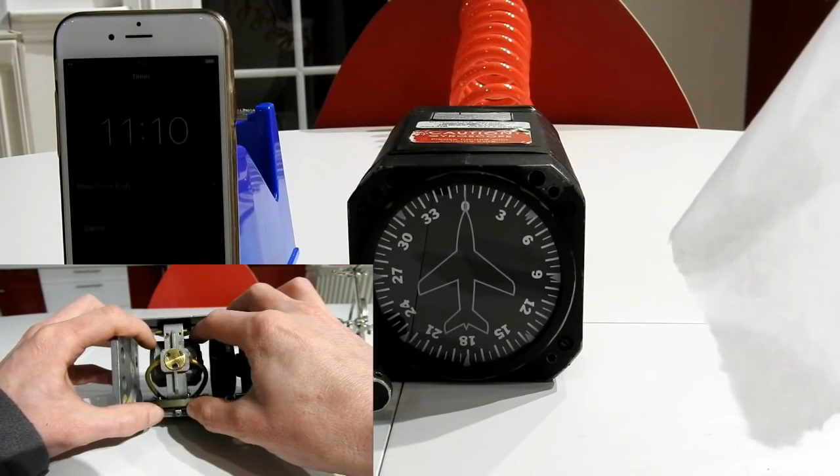So by not allowing it to move, i.e. testing it as we are doing on this flat level surface, we are not allowing any mechanical friction to induce onto any of these bearings. So if we eliminate mechanical friction or mechanical drift, all that should be left is apparent drift, which of course is what we're testing for right now.

So it seems to me like this would be the easiest experiment to perform in the classroom to demonstrate the spin of the Earth to children. The experiment's very simple. You set the gyroscopes spinning at the beginning of the class, and these gyroscopes could be easily mass produced in this day and age using electric motors.

And you would give the student a map and get them to locate their current position on the map, find their latitude, then give them the sine formula to calculate the drift angle, get them to plot it on a graph over time, and this will obviously produce a sine wave.

What better way to combine geometry, geography, maths, science, orbital mechanics, and obviously they will be able to check their result and check their calculations by reading off the angle on the gyroscope. But of course, nothing like this is ever done, and I think I'm beginning to see why.